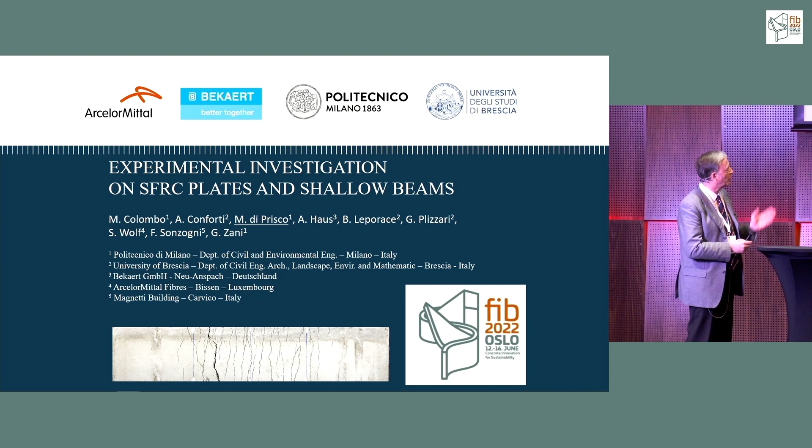In 2010, in model code 2010, we introduced for the first time fiber-reinforced concrete, which has a long history because it was born in the 60s. We also had the opportunity to discuss in the Eurocode the basis introduced for the first time in model code 2010. This was a fantastic test bench to understand if all the main assumptions could be realistic or not. I would like to use the 15 minutes I have here to highlight three main concepts by means of an experimental investigation carried out with the help of a lot of people belonging to the framework of Eurocode 2, because this was, in my opinion, very interesting, and it will also be considered in the new model code.

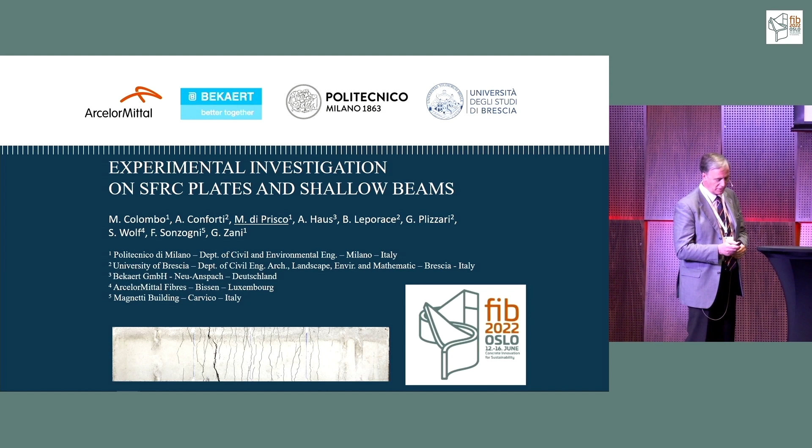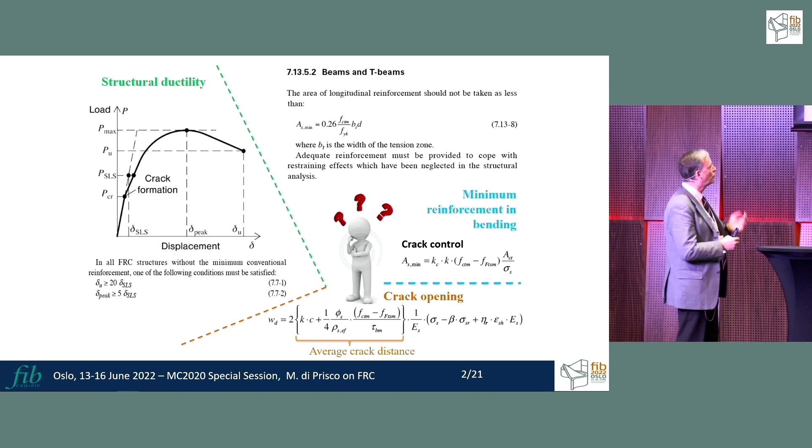We have essentially three concepts I would like to discuss. One is the minimum reinforcement in bending. You know there is a minimum related to the capability to satisfy the cracking moment, at least, and another which is able to control the crack. There is a problem of durability, strongly related to the crack distance, and also a general problem about the ductility of the structure in order to know if you can use limit analysis or not.

We started from this experimental campaign where we adopted a conventional reinforcement. You see the numbers. We had essentially two materials, one with a type of fiber which is a classical hooked fiber, with the same geometry between the two types of fiber, and we used two different amounts, 55 or 70, suggested by two important companies who participated in the discussion and are co-authors of this: Arcelor from one side and Bekaert from the other. The only difference is the amount of superplasticizer between the two mixes, and the shapes are similar. The only point is here we used a double hook, and here there is a simple hook.

So Arcelor is simple hook and Bekaert is double hook. You see that mix 55 means fiber content, A and B are types of fiber, 70 is the other fiber content, and when you use plus R, it means we are using that material but with reinforcement.

And when we built this type of material, we did other tests. So the material is the same, but the bench was different. In terms of the steel for the fibers, you see there is a difference - the Arcelor one was a little bit lower in terms of strength than the other one.

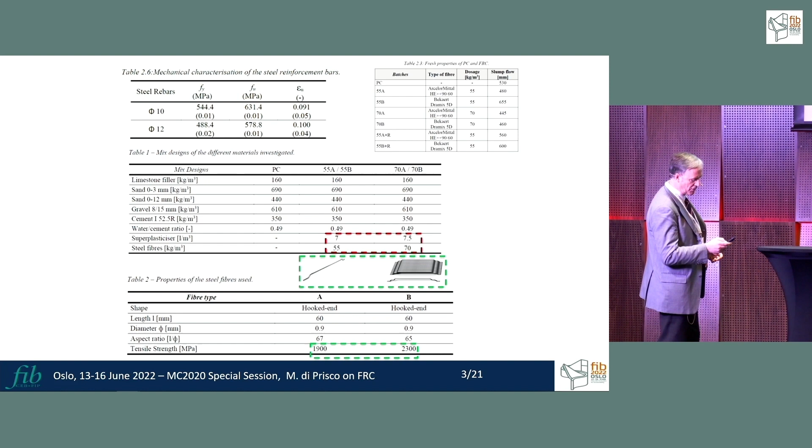When we did the first test, based on the classification - this is a very important point because we would like to classify the material by means of this test - you see that practically all the types of material are around 5D. There is only one that was able, with 70 kilograms of fiber, to become some 5E.

There was a situation that was interesting to know, because it happens sometimes: in one case, the case where we have 55B plus the reinforcement - so the bench where we also use reinforcement - it was only 2.5E with the same amount of fibers, and 4E was a case where you have 55B. So this is the same material, but two different benches. So one very important question that sometimes happens: are we able to guarantee always the same class?

And the reply is very simple: depending on the mix, you can see the difference here. You can change the standard deviation, and you can change a little bit the average value, which are correlated - if you cut your specimen in 3 parts - also to the number of fibers that you have, of course, in the most important one. This means that according to this very simple equation, based on this coefficient introduced by Lucie Vandewalle and this group for this type of test, which corresponds to the orientation factor, you find this number of fibers, 0.64 or 0.82.

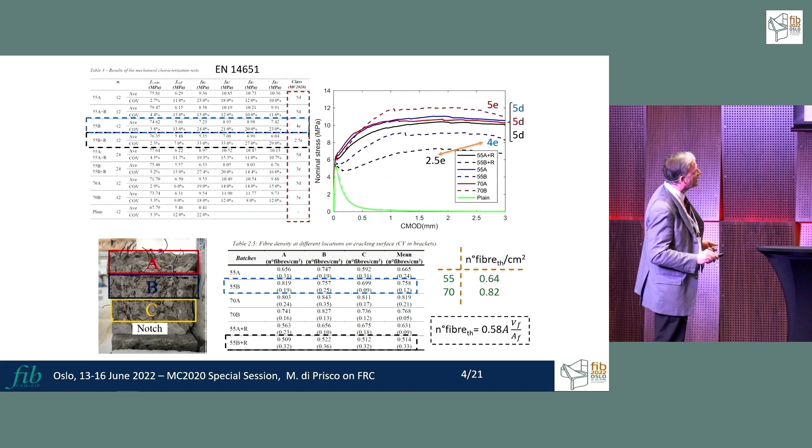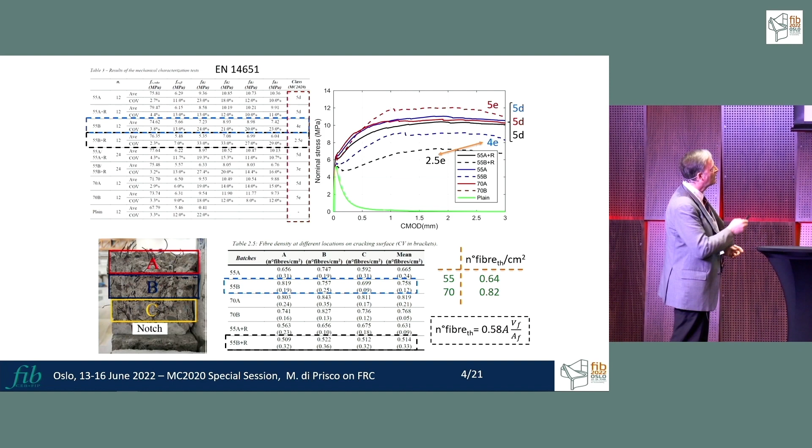And you see the number per square centimeter, of course. If you look at the numbers here and here, there is a very important difference, especially in part C. This means that if you don't optimize your material as best as possible - because we selected only two mixes, we didn't optimize with respect to the fibers - you could have this kind of problem, which is very important to know can happen.

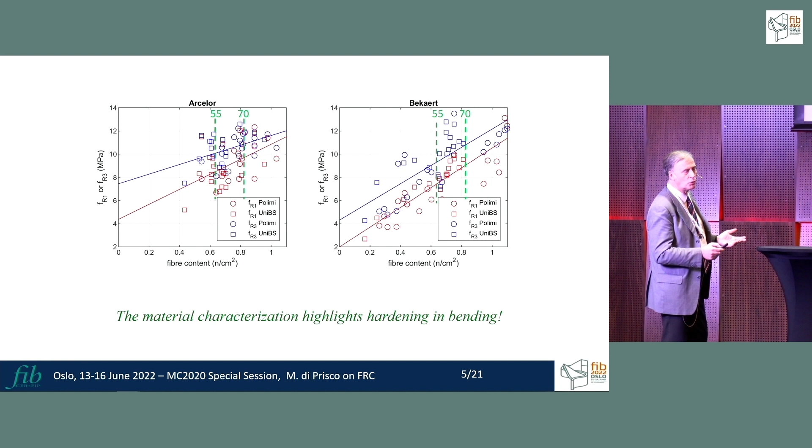If you put the fiber content versus the FR1 and the FR3, we always see that the fitting gives us a hardening material, because the blue line, which corresponds to FR3, is always larger than FR1. The two lines correspond to the theoretical values we could have in terms of fiber content. You see the two mixes show different scattering in terms of fiber content.

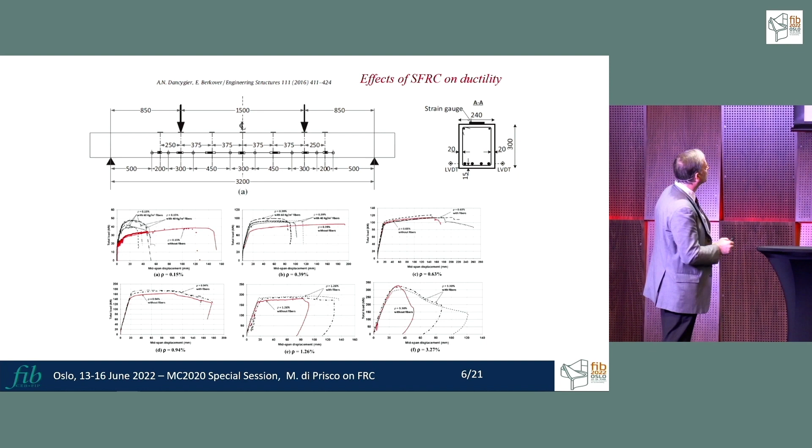So when you put fibers, 55 kilograms per cubic meter in this case, so 5D, we reduced the amount of reinforcement, and we also investigated the case when you add the largest amount, with 70, and no reinforcement at all. So this is a classical idea of complementarity between conventional reinforcement and fibers.

If we look at the reinforcement ratio, we are close to 0.29%. If you compute the minimum reinforcement for the cracking moment without considering the effect of the fiber, you have 0.25, so this is larger than that. And if you consider the minimum reinforcement for crack control, you have, depending on FR1M, two different values, which correspond to 0.2 or 0.5%, depending on this value.

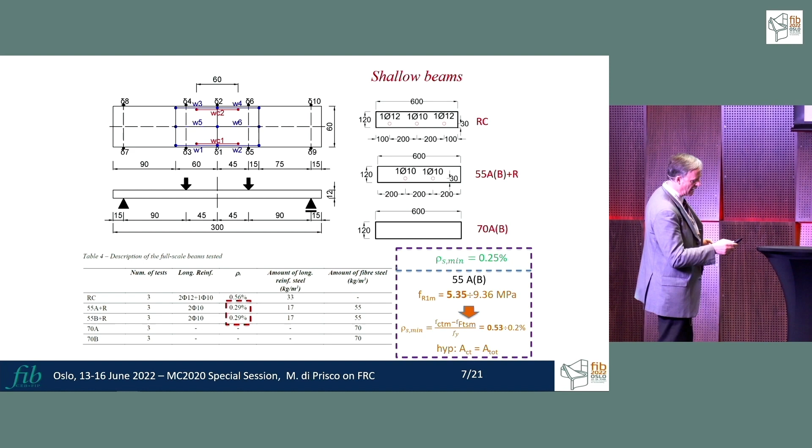We saw that there are different average values for these materials. When we did it, you see what happens for conventional reinforced concrete structures, and what happens if you have reinforcement plus 55 kilograms. This was the behavior, and here is the situation for 70.

So if you have 70 kilograms, you couldn't always guarantee ductility, and sometimes, as in this case, you have one main crack and you cannot have even a quite significant crack pattern. So obviously, the number of fibers we put inside is not enough to guarantee the same ductility as a reinforced concrete structure.

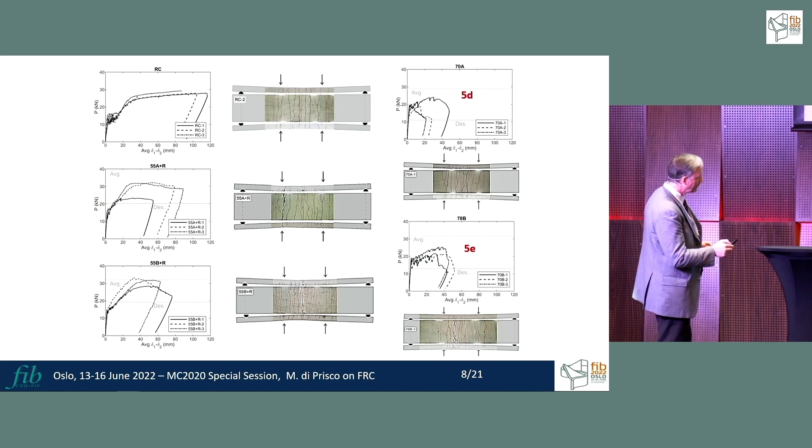We can conclude that in the model code, fiber can never substitute longitudinal reinforcement in a linear element. Not only that, but when we want to guarantee ductility, we need to double the minimum reinforcement. So essentially, you have to use a crack control amount in order to guarantee ductility. So this is the first point.

Now let me pass to the crack distance. According to the equilibrium, neglecting what happens in the two exterior parts of this equilibrium, so imagine we are in a tie, we have to consider this effect on the crack, and considering this effect on the crack, you have this contribution. This means that you can reduce the crack distance.

Sometimes we can also work on this subject because we know that tau BM could be increased, but at the moment there is no sufficient formulation to do it. So we like to open the door to design by testing. If you find a better behavior of tau BM, you have to check, and then you can introduce it to evaluate this in this equation.

What is very important is that when you use this equation in shallow beams, you lose a contribution of equilibrium along the two parts, which correspond to this perimetrical, or border, surface.

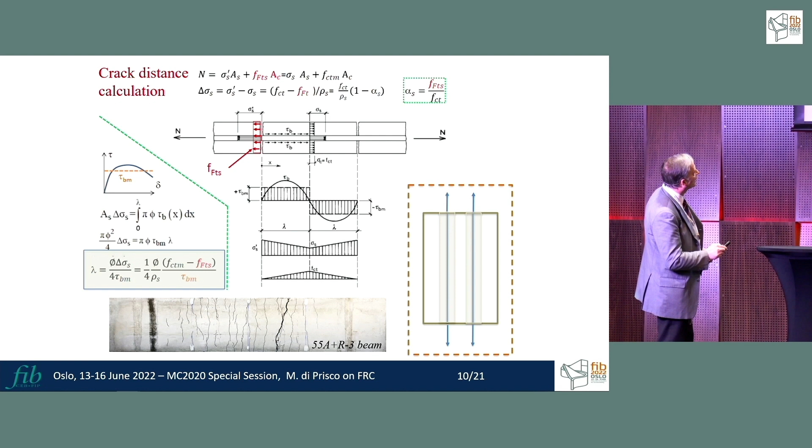According to the equation, we arrive at this expression with this assumption. In Annex L, we always have this equation, or this one, and you have to consider the minimum of these. But if we consider the minimum, the risk is that you are using the equilibrium equation without considering the effect of the border surface. In our opinion, it's much better to always switch to this one, and this is something we are still discussing.

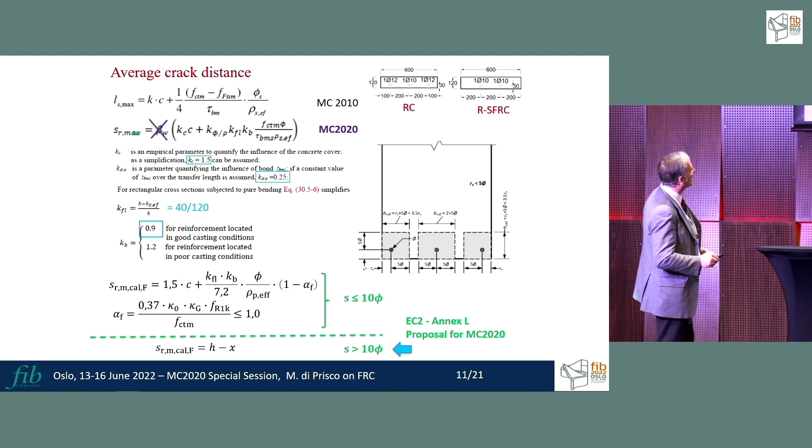If you look at the results, this is the experimental value we had in terms of average crack distance. We had the possibility to count the global number of cracks in a certain zone, so we can compute the average crack distance.

Here you see what happens with the EC2. By imagining switching the case of h minus x from the equilibrium one to when you consider the minimum global, if we work with this minimum, we risk not being on the safe side for this case.

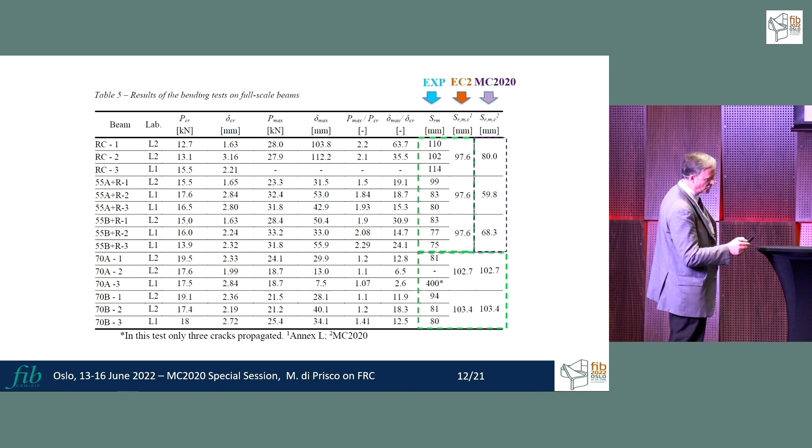We also have to remember there are special cases where, if the reinforcement is not homogeneously distributed in the cross-section, this creates a situation where the crack distance changes. For instance, in this situation you can have even 3 different crack distances, depending on the zone and the reinforcement ratio in that zone.

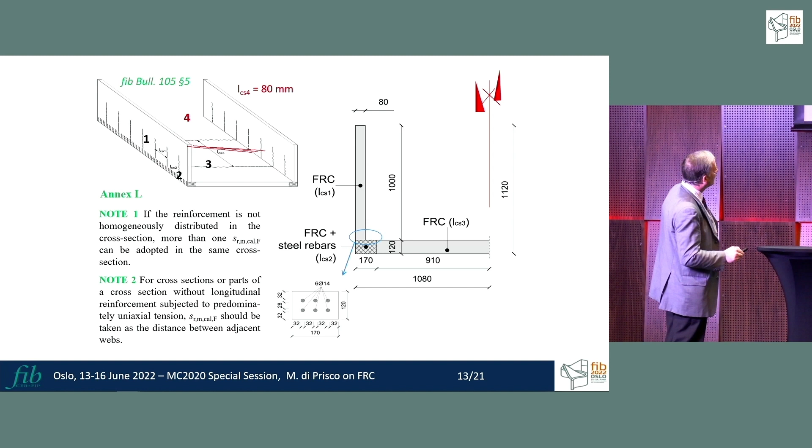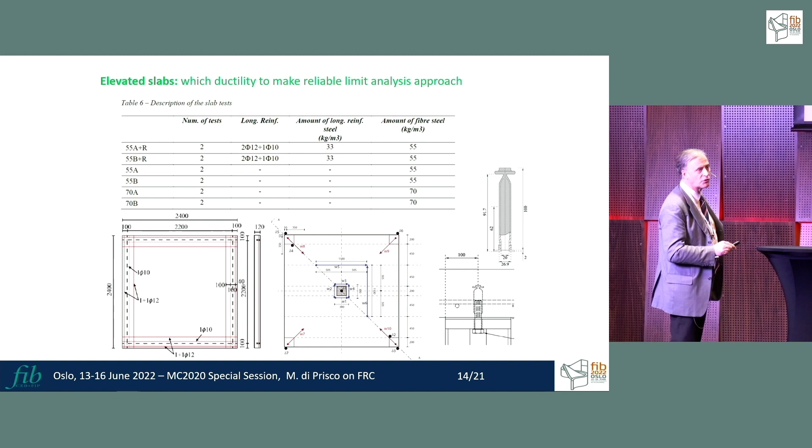When we pass to the limit analysis, so to the global ductility of the structure, a lot of people ask if it's possible to put the reinforcement, for instance in a square slab, only on the perimeter. This was one of the subjects we wanted to investigate.

We put this type of longitudinal reinforcement on the perimeter. We measured all the crack opening in the zone close to the corner and in the center where we put the central load, or at a certain distance, essentially on average, always on the bottom.

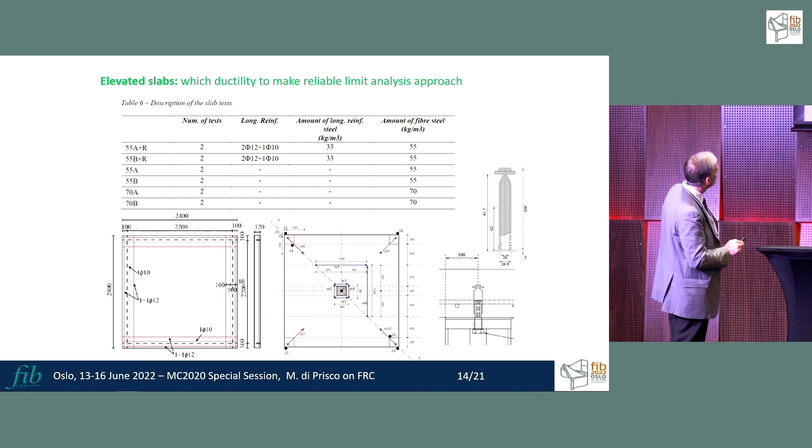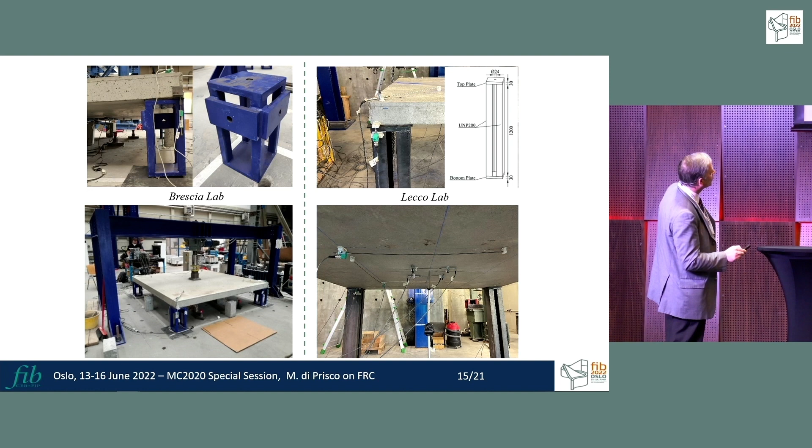We compare the situation with the case of 55 plus or without reinforcement, and 70 without any type of reinforcement. We had two different labs, because as you've seen at the beginning, this was done in cooperation with the University of Brescia and the Plizzari team. We had essentially two different supports, with a different stiffness between them.

The results we obtained are these: this is lab L1, L2, and this is what happens when you have only 55, A and B, in this case 70, or the hybrid case with also reinforcement. So even if you don't have distributed reinforcement but only on the perimeter, this is enough to guarantee better ductility. This is obvious, but you also see the design and average values, which are always on the safe side.

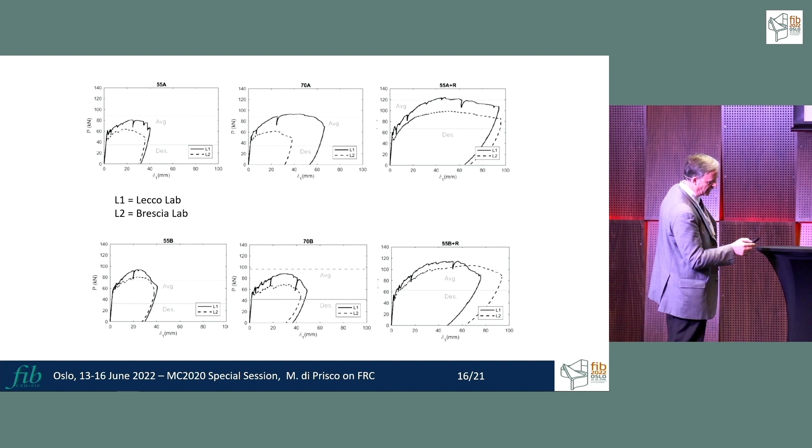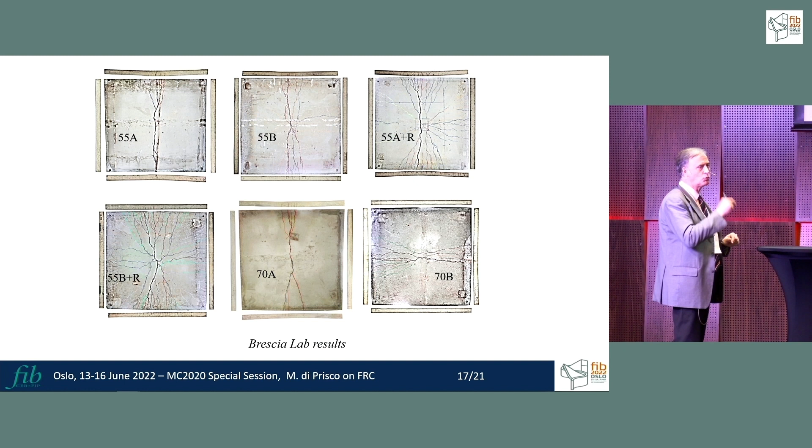We also analyzed the crack pattern. If we put this slab without choosing a special way to mix - not casting from the center, but casting in a quasi-random situation - you find that the fibers could be distributed differently, and not always do you find a full cracking pattern, which is what we assumed in the limit analysis.

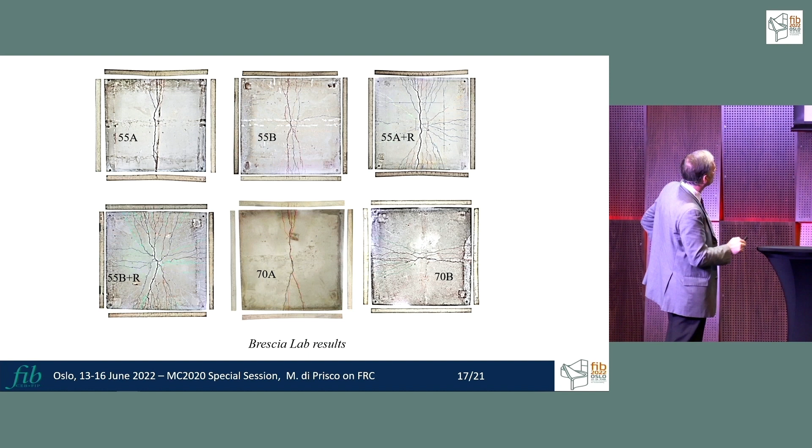This is the case, for instance, for the two labs. It's very interesting to know that the crack pattern evolves in one direction and then in the other when you reach a certain load. That means that even if you don't have exactly a crack pattern, you have a stress very close to the value you have in mind.

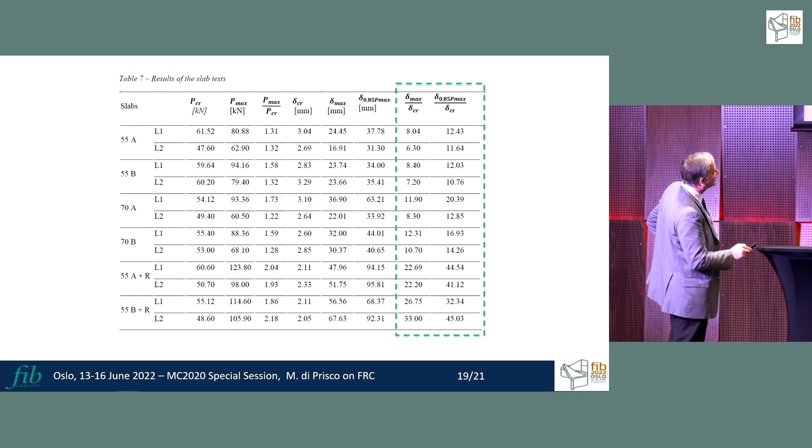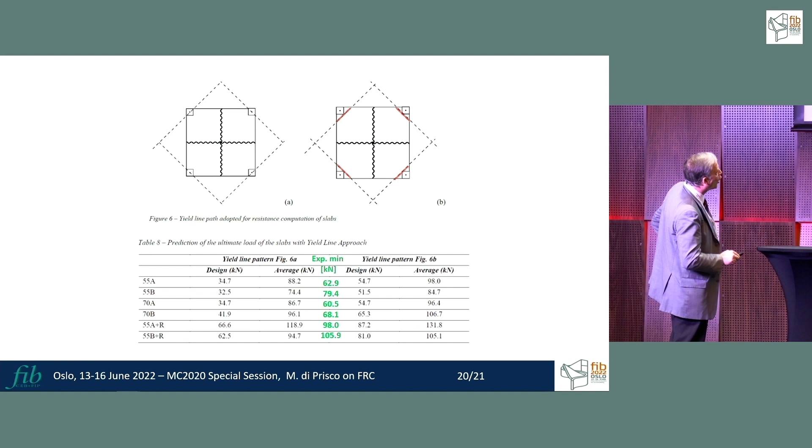If we compare the ductility, referencing the cracking value and the peak one, or in terms of displacement evaluated when the load is only 85% of the maximum peak load, and the cracking one, you find the ductility values we obtained in all situations. So the ductility is enough to use limit analysis, and if you're a designer, you usually don't take into account this possible contribution close to the support. You work with this, comparing the design value and average with the minimum experimental value obtained, and you always have a factor of at least 2.